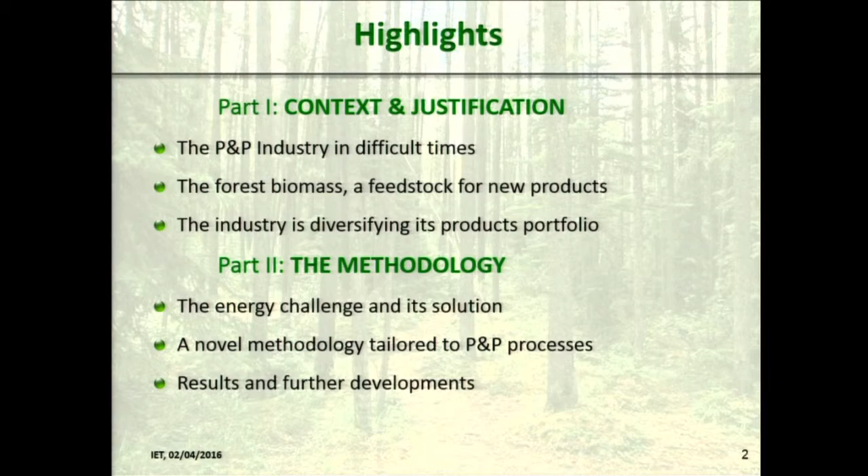So the main subjects of my presentation are divided in two parts. First, the context and the justification of the energy enhancement of the pulp and paper industry. This industry is in difficult times, and the forest biomass is a very appropriate feedstock for new products. The industry is diversifying its portfolio of products. The second part will be on the methodology itself that we have developed. There are challenges to be confronted, so we have developed this novel methodology, and I will present the results and further development.

So, as was said, the pulp and paper industry in Canada has been traversing a difficult period for some time. One reason is that the demand for commodity products, newsprint, printing and writing paper, is declining, and we all know why. It's because of the iPads that you are working with now instead of working on paper. Another reason is that there are new and large pulp making facilities coming online in regions with fast-growing forest and low labor costs, for example, in Brazil. Trees grow much faster in those regions, and we cannot compete with that.

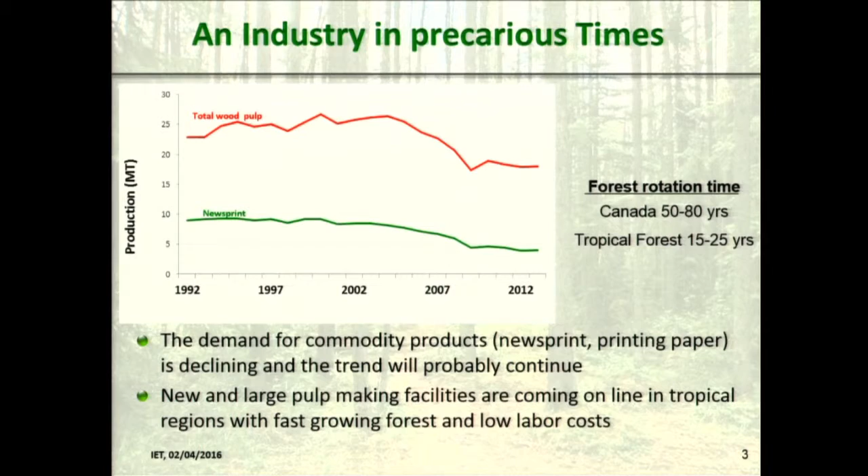So if it is managed and exploited responsibly, the forest biomass has a net zero carbon footprint. That is, the carbon which is absorbed by the new growing biomass is superior or equal to the CO2 which is generated by the conversion and utilization of wood. So the net balance can be nil. Forests also have the advantage of not competing with food crops for arable lands. It grows generally on marginal land, which is an important advantage.

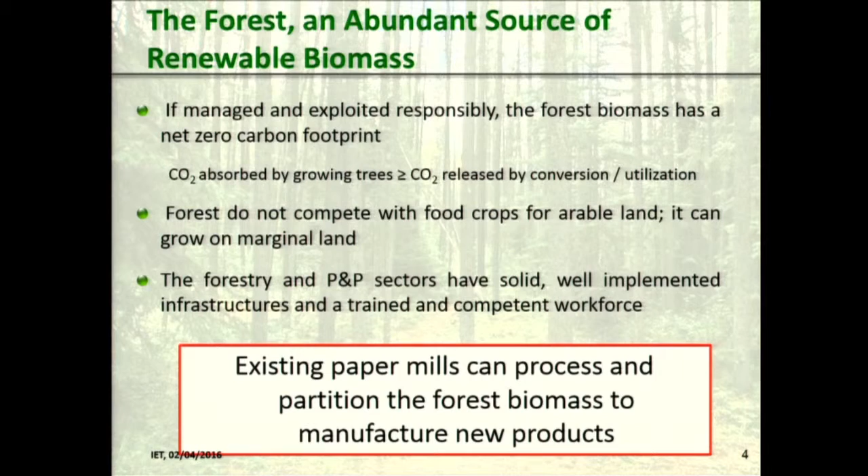The forest and the pulp and paper sectors have solid, well-implemented infrastructure and a trained and competent workforce. Existing paper mills can process and partition the forest biomass to manufacture new products, and we will see that a bit later. Well, what kind of product can be manufactured? The three main components of wood are cellulose, hemicellulose, and lignin. They are all in the range of 30 to 35%, depending on the species of tree, the climate and the soil.

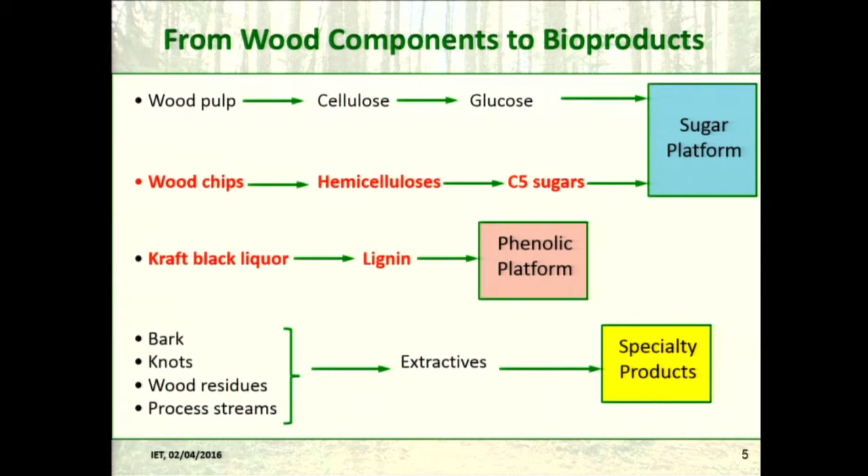We have concentrated our work on the hemicelluloses and lignin. Hemicellulose is a very complex polymer of C5 and C6 sugars, and therefore it can lead to the sugar platform where there are abundant opportunities for manufacturing products. The Kraft lignin is a phenolic compound which is very complex, and it can also be the door to the phenolic platform of chemicals. Finally, the extractives are small concentration products of a great variety, but they can also be used and transformed in specialty high-value products. We will discuss hemicellulose and lignin.

Now, the concept of integrated biorefinery consists in building a biorefinery, which is a process in which a component of the wood biomass is transformed into a new product, on the site of a pulp and paper mill, and to integrate the two so that the needs in energy, water, steam, and raw materials are supplied to the biorefinery by the paper mill.

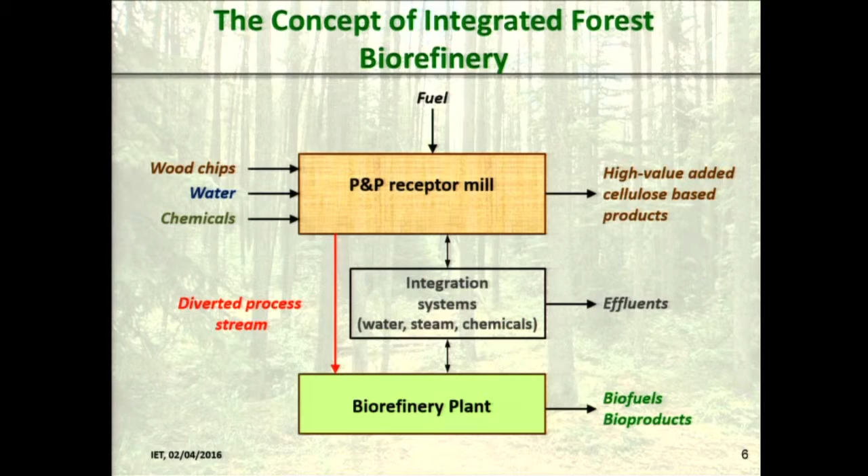Here we are dealing with mills that make dissolving pulp, which is a high purity pulp used as a chemical precursor, for example, for rayon and cellophane and other places. It's not used for paper, and the interest for us is that a part of the hemicelluloses is removed at the beginning and then reintroduced later.

Here, I think I have gone too fast, but that's all right.

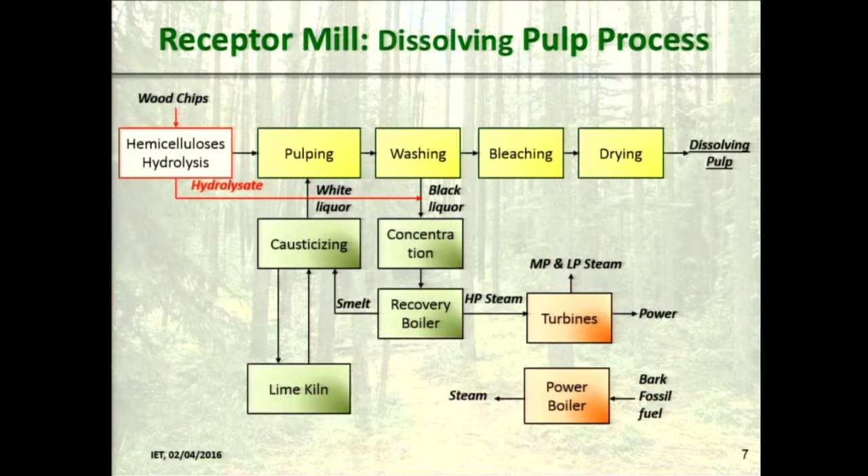Here, there is hydrolysis of the hemicellulose to purify the pulp, and it's re-injected to be concentrated and burnt in the recovery boiler of the Kraft process. So what we can do is take part of this, or here it looks like we would take all, and transform it into a biorefinery.

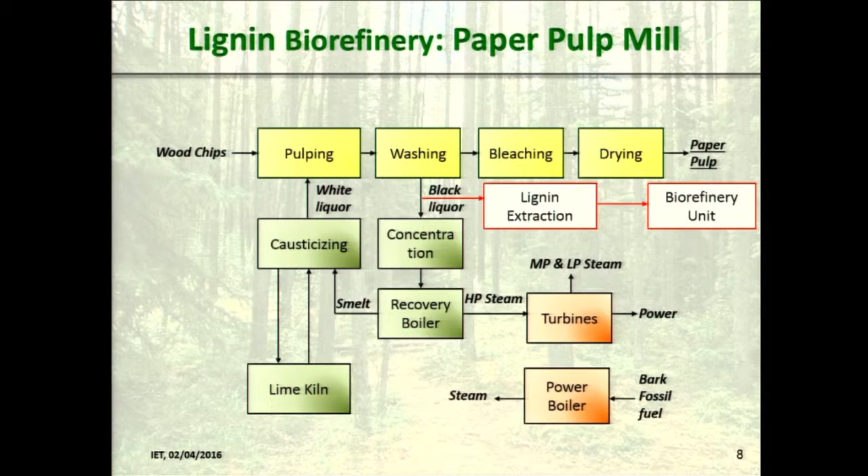Another thing that we can do from the Kraft pulping process is divert some of the black liquor and extract the lignin which is in it and which is normally burned in the recovery boiler. And this lignin is directed to a biorefinery plant.

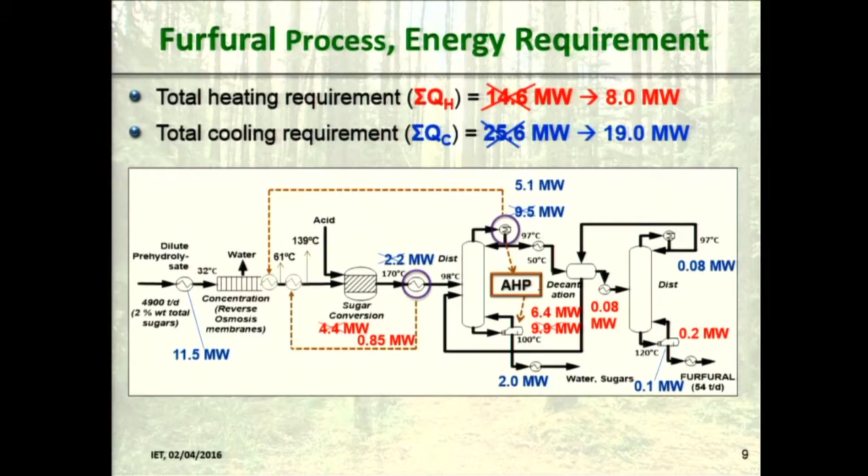Okay. So the integrated forest biorefinery may be a very effective way for the pulp and paper industry to expand its product portfolio and penetrate new markets. It must, however, reduce or eliminate fossil fuel consumption, which generally is natural gas, by energy intensification to reduce its operating cost and the emission of greenhouse gases. And that's really the core of my presentation.

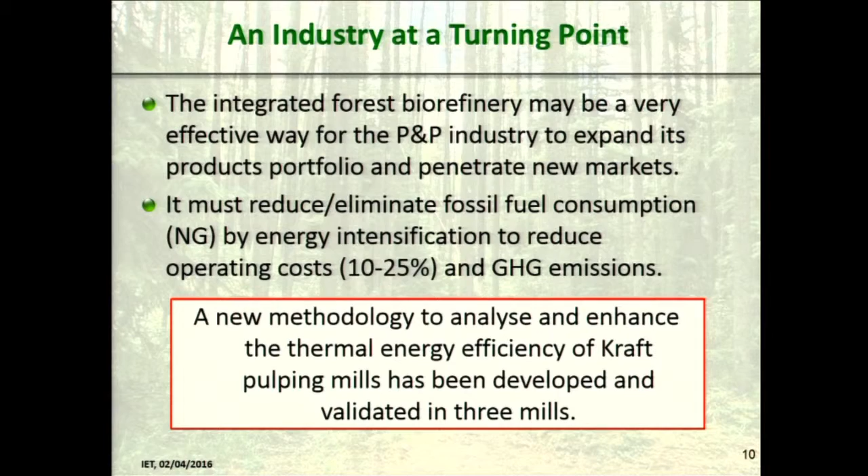We have developed a new methodology to analyze and enhance the thermal energy efficiency of kraft pulping mills. And we have validated it in 3 actual Canadian mills in operation.

All right, I'll never master this thing.

Okay? All right. So the main points of this methodology: it's not a fancy optimization mathematical type of thing. It's practical. It's a practical stepwise project-oriented procedure. It combines steam and water, very important, because in a kraft process and in a biorefinery, they are water-based products, and therefore water is also a vehicle for energy. We use heuristics, and I'll come back to that. And of course, the work is supported by a simulation of the process.

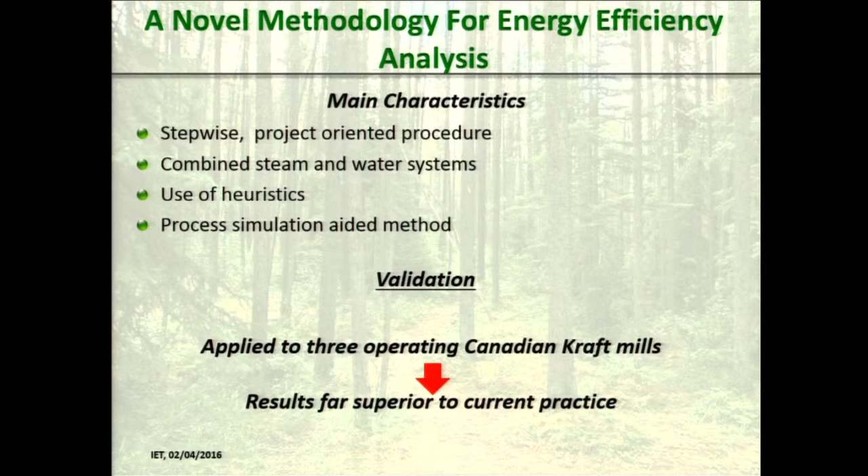Now, one of the methods that we have used, but it's not really very important in the project, is the conventional thermal pinch analysis. I'm sure that most of you know what it is. In a process, we have some streams which must be cooled. So they are the hot streams from which we must remove heat. And then there are other streams which must be warmed.

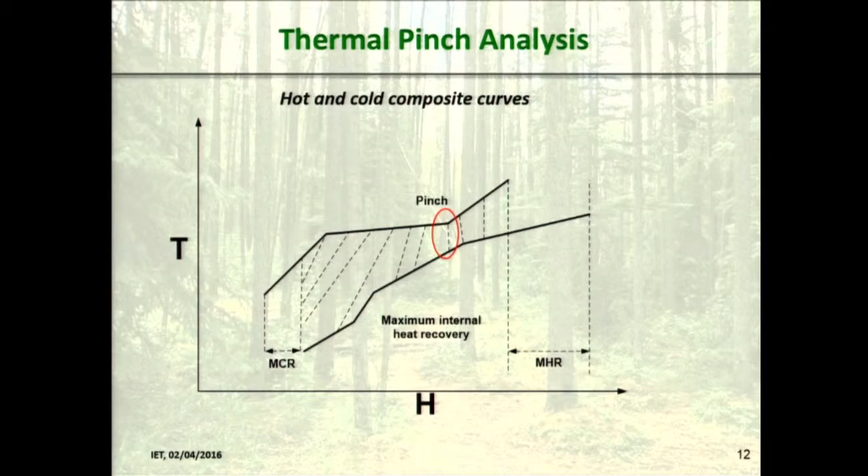So we form 2 composite curves, one of the hot streams and one of the cold streams, and we try to bring them as close as possible, but there must always be an interval between the 2 so that the exchange is done, and then a part of the heat needed by the cold stream can be supplied by the hot one, but at both ends there is a region where there cannot be exchanges, and this gives you the minimum heating requirement at the right end and the minimum cooling requirement. This is a classic, and we thought that maybe we could even do better.

Good. Now, in a process such as the pulp and paper process, which is water-based, there is also a lot of heat transported by water. So the method called water pinch is the same idea as for heat, but the representation is not the same. Here you see the purity of the streams, the sources of water, which are the horizontal lines at the top, and the need for water, which are the sinks.

The bottom lines are horizontal, and they form not ladders but stairs. So when you bring the 2 stairs to bump into each other, that gives you the maximum water that you can reuse from what is already in your process, and at the other end you have the minimum waste water produced and the minimum fresh water required.

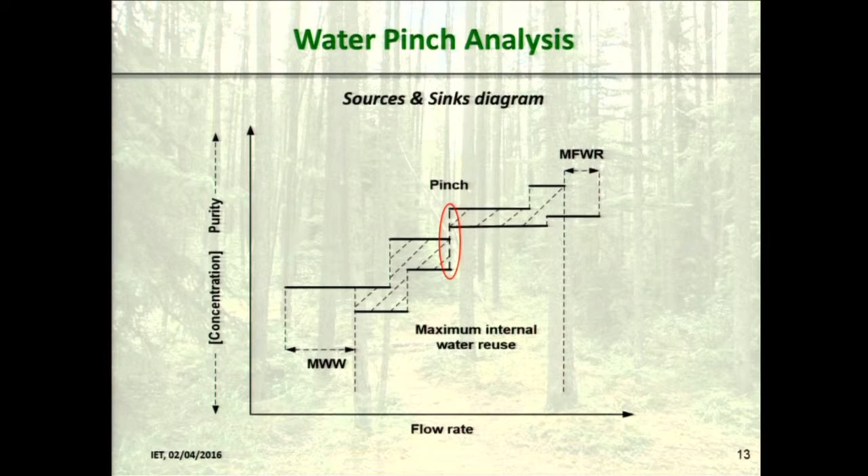Now, the interest of the water stream analysis is that we have the water and purity, which is the diagram I showed before, but also their temperatures vary. And this gives us some opportunities for additional benefit.

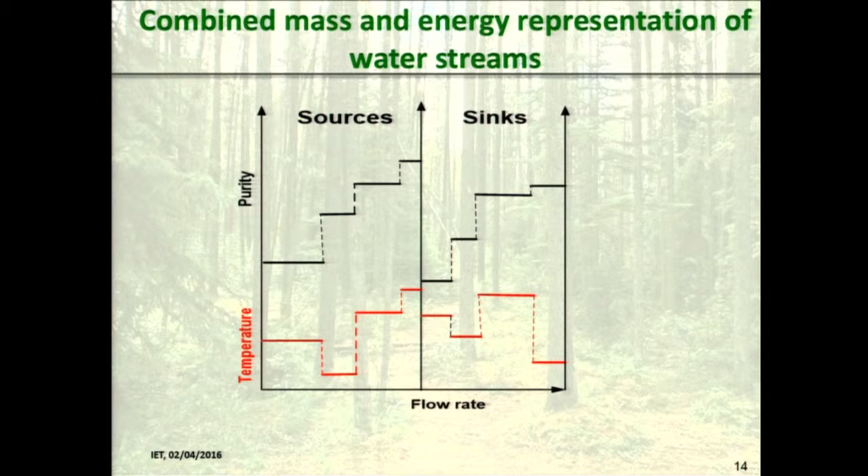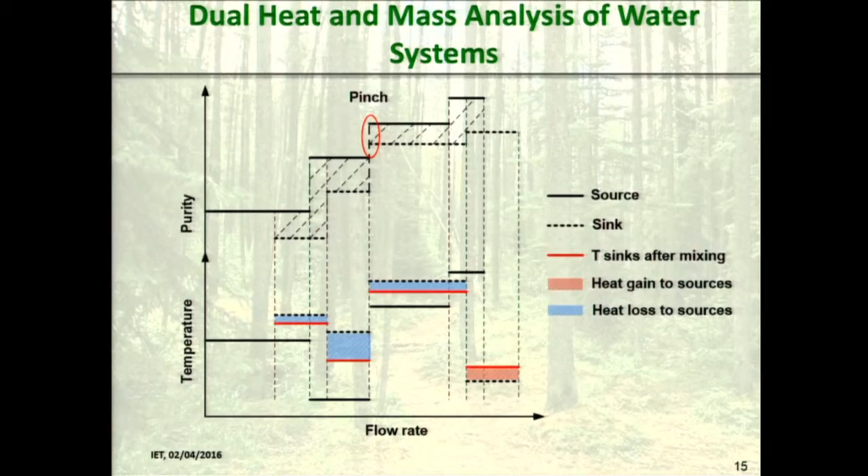Here it is. Here I have combined at the top the first diagram with the two composite water curves, and at the bottom I have the representation of the heat contained by those streams, and therefore how much heat can be gained or lost by the sources. So this is a combined heat and mass type of analysis derived from the... what was I saying?

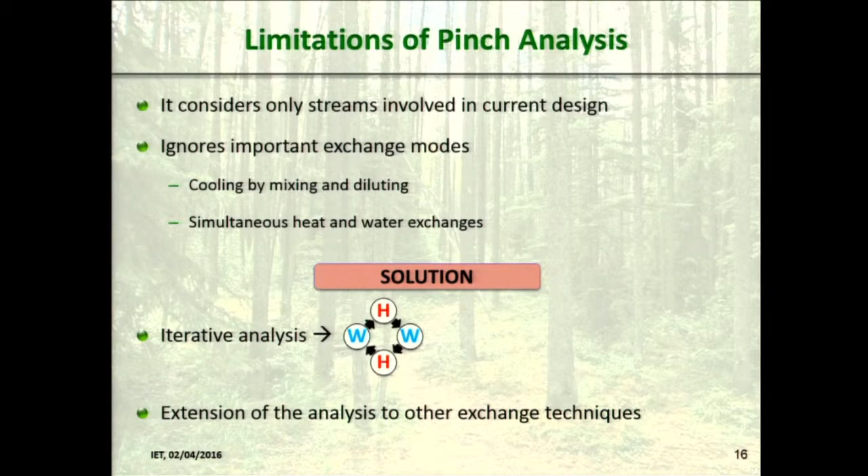Okay, so there is a limitation for both of those analyses: they take into account streams which are in the process, which are already there, and they try to improve the exchanges between the streams, but they do not create new connections, and therefore they ignore a certain number of exchanges in a process, such as cooling by mixing and diluting, and simultaneous heat and water exchanges. So we have to do it iteratively between water and heat, but we also have to extend it to other

processes. Here is a kind of a schematic diagram of the type of energy exchanges that occur in a plant. Now the bubble at the center is thermal pinch analysis. The yellow bubble is water pinch analysis, but we have also to take into account mixing. There is a lot of stream mixing in a pulp mill, which is not treated by the two previous methods. And there is also a lot of condensate that can be reutilized, so that we have a lozenge here.

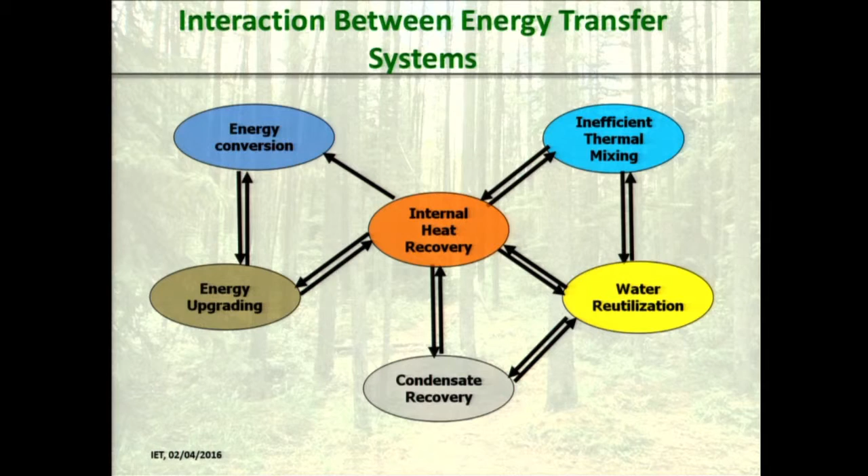A lozenge, and when we have optimized that, we have the possibility to upgrade energy by using a heat pump, or to convert energy into a heat and power unit. So we must consider all of that. So we have developed a stepwise method, which has those steps here. First, developing a database, of course, which is a simulation of the process. We'll come back to each of those methods. Then we have pre-benchmarking, which is evaluating the state of the process as it is before we do anything.

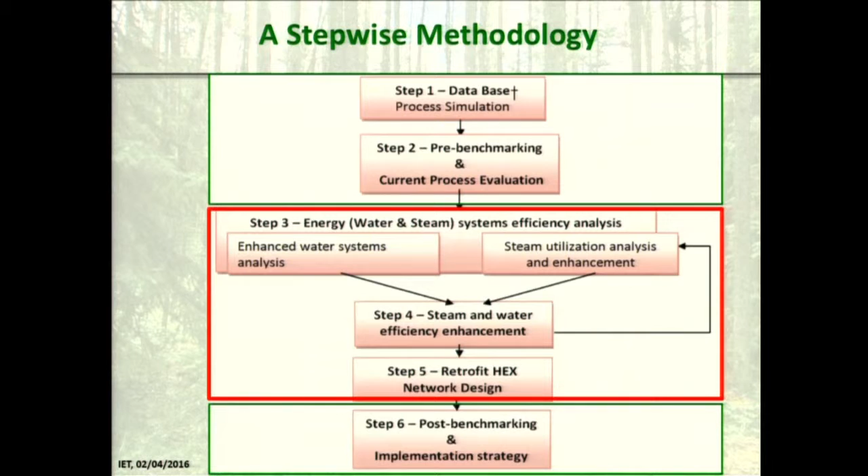Then the core of our methodology is energy in form of water and steam systems analysis, the steam and water efficiency enhancement. This leads to retrofit heat exchanger network design, and finally post-benchmarking, which is comparing the end to the beginning. So I'm going to develop those parts, which is really what is new in our methodology. I will come back to step 1 and step 2 because we are continuing our work and we are doing development here.

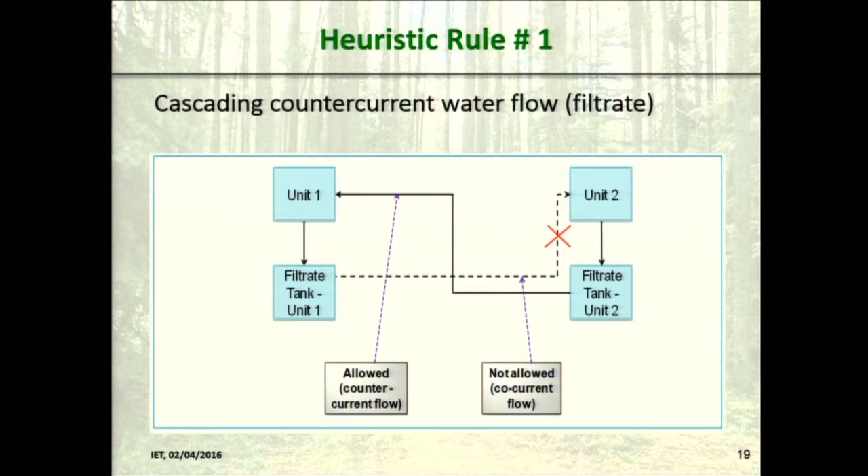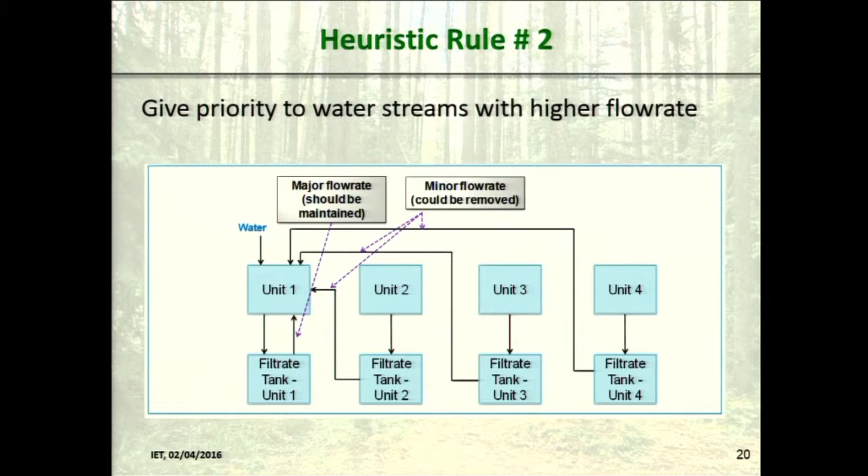So the method is based on the application of heuristics to the process to improve it. Now, there is nothing secret to heuristics. Here is cascading countercurrent water flow together. And when we go in a mill and study in depth the process, we feel that this simple way to improve the process is not very much used. And it's the same for the other heuristics. Give priority to water streams with higher flow rate. That's obvious that you should do that. Well, you'd be surprised. It's not always done.

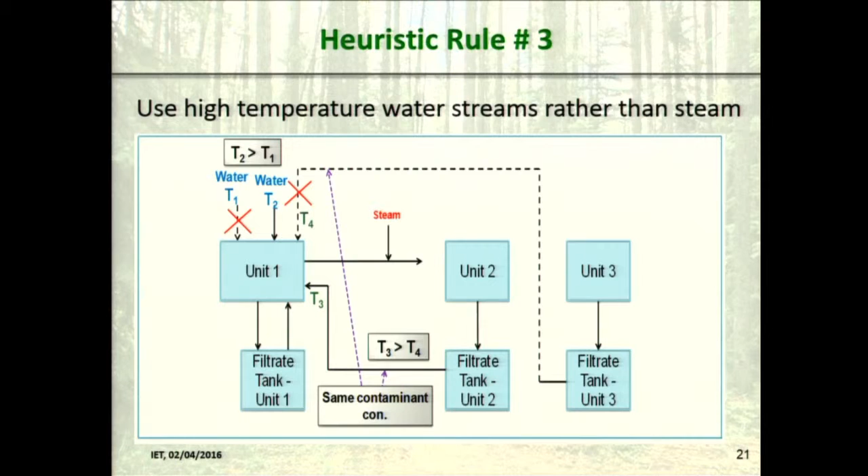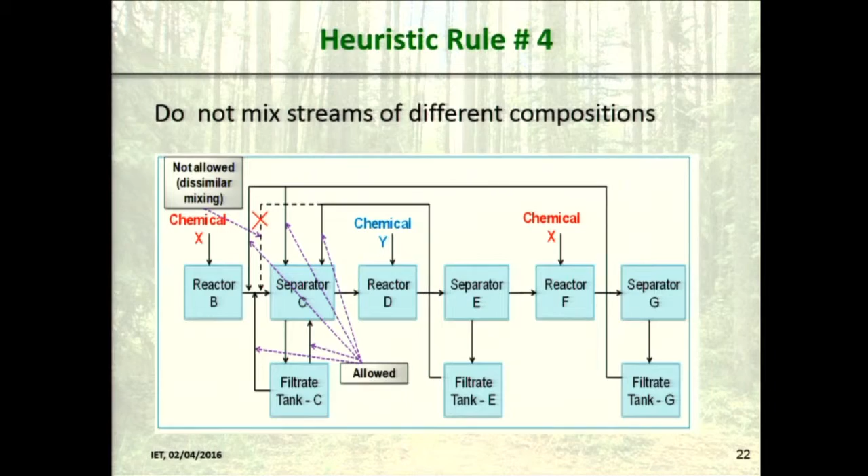Then high temperature water streams are preferable, when you can use them, to steam streams, because it costs less to produce hot water than to produce steam. And finally, that's also something which is often done. For practical transport and pumping reasons, people have had the tendency to gather streams together. But here, some of those streams are fatally diluted. So this is not a good idea either.

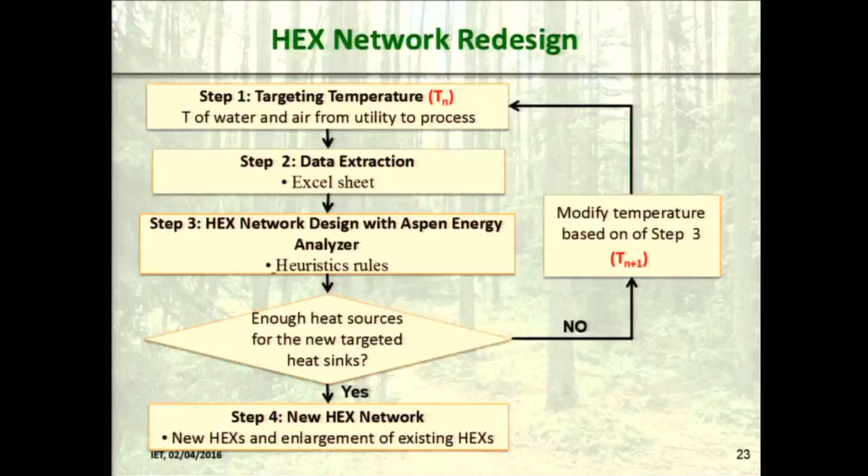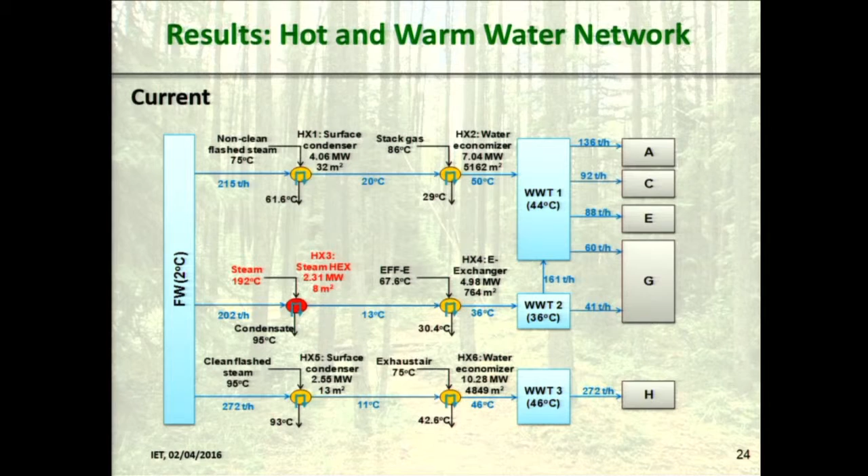Now, here are results. You see, this is a diagram of the hot and warm water network of a kraft mill before we have done anything. I'm not going to explain to you in detail what it is. That's not the point. It's just that we start with a photograph. That's the hot and warm water network. And then, by the techniques that I have talked about before, we look at how we could improve that, and here are the results.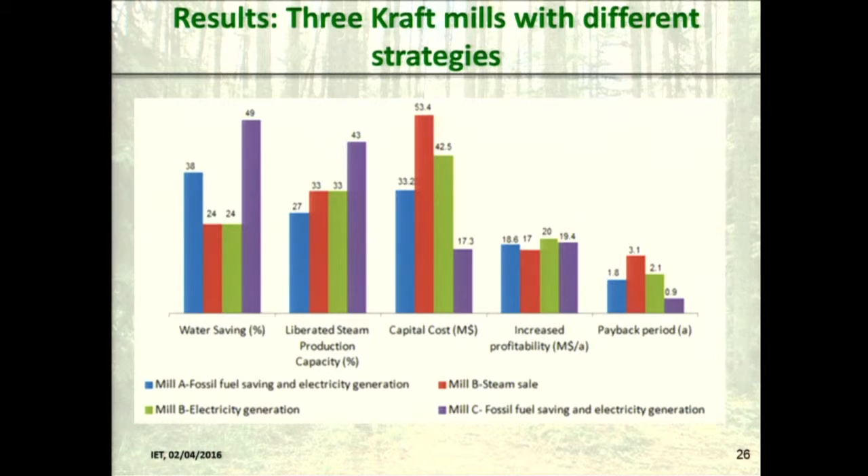The mills will consider up to 2.5 years - I may be contradicted by a colleague and former student, Enrique Mateos, who is working in practical things at FPI - but the 3.1 year would be considered as maybe not acceptable in the current economic climate, while the 0.9 is a must, you must do it, and the 1.8 to 2.1 are in between. Probably it would be done.

So now coming back to the beginning, this is still in progress. In other words, we are improving those two steps. So the database is essentially a simulation of the operating plant as it is, and we use the Cadsim platform, which is a software broadly used by the pulp and paper industry in Canada.

So we archive from, there are lots of instruments that make measurements constantly in a mill, and they are stored in software. It's called the virtual private network, which I think is a nice expression. And we were given access to this virtual private network, but we had the students - I say this was done mainly by students.

They went to the control room of the mills and copied the values of the parameters, and those values change all the time. Not necessarily very much, but they vibrate. So you cannot read everything at the same time, and if you just read one value, in other places it will not give you congruent heat and mass balances. So we made lots of readings, and then we apply a process which is called reconciliation of the data.

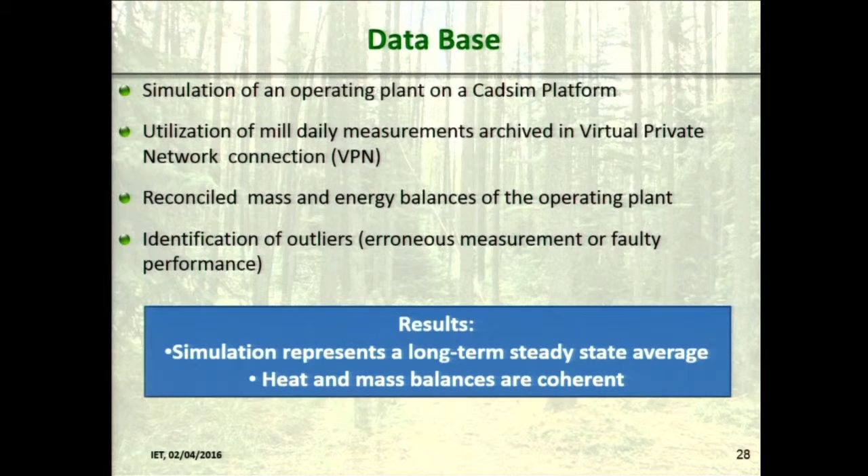And when we do that, we observe sometimes that there are points which are clearly out of range. So we have observed there an equipment which doesn't work, and we can correct it eventually. So after we have done that, we have a simulation which represents a long-term steady state average, and we have a heat and mass balance which is coherent, which form a working ensemble for the whole mill.

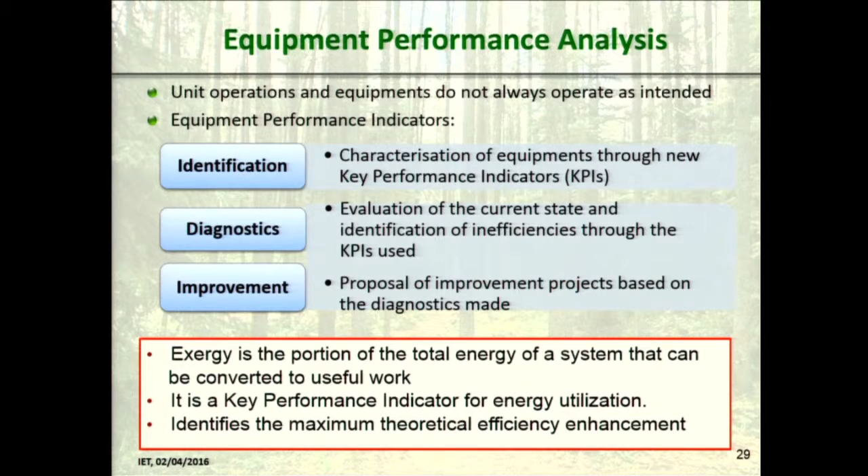The second step of my method that I showed earlier is equipment performance analysis. To do that, we characterize the equipment by what are called key performance indicators, and if you go to industry, people will know pretty much what that is. But here we have used exergy - that is a novelty in the pulp and paper industry. Exergy is really a powerful tool to analyze heat processes. So we have developed key performance indicators based on exergy, and this has given us more power in analysis.

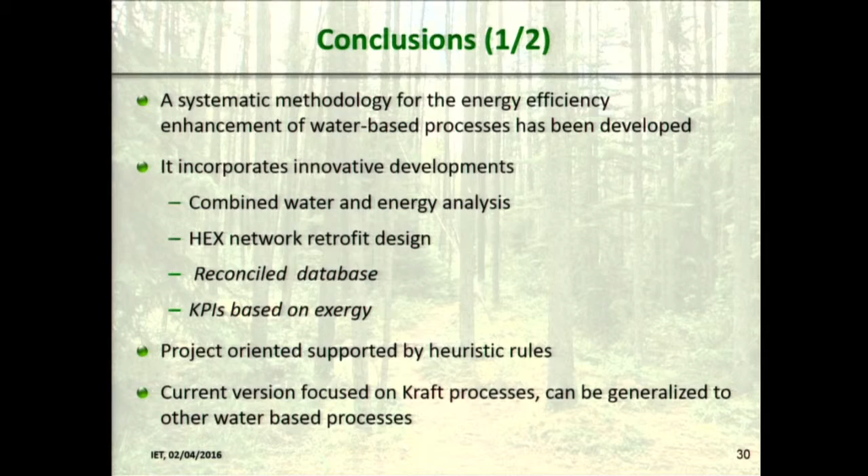So I arrive at my conclusion. A systematic methodology for the energy efficiency enhancement of water-based processes has been developed and incorporates innovative techniques, or we think innovative, which are combined water and energy analysis, heat exchanger network retrofit design, and - I've put in italic the two things I was just discussing - reconciled database and KPIs based on exergy. The method is project-oriented, supported by heuristics, very simple good sense things, and the current version focuses on kraft processes. We hope it can be generalized to other water-based processes.

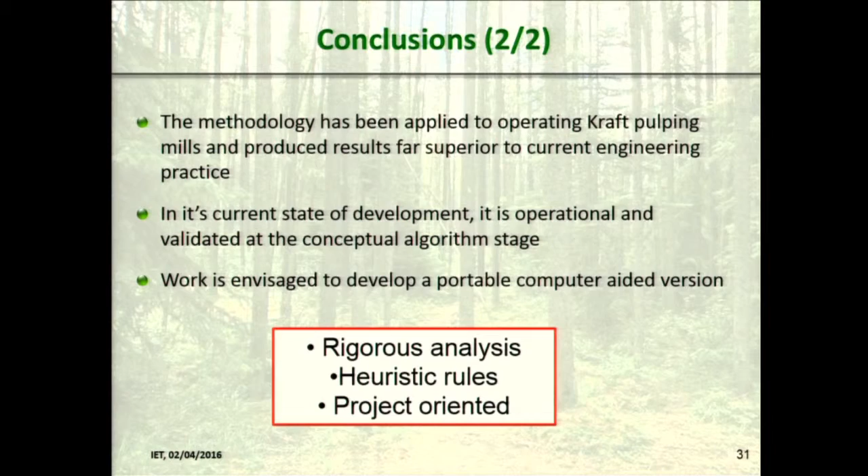Finally, the methodology has been applied to operating kraft pulping mills and produced results which are very impressive and interesting, beyond what is normally done by usual engineering methodology. In its current state of development, it is operational and validated. Work is envisaged to develop portable computer-aided versions. So what characterizes the method is rigorous analysis, heuristic rules, project-oriented, and that's the end of my presentation. I thank you very much.